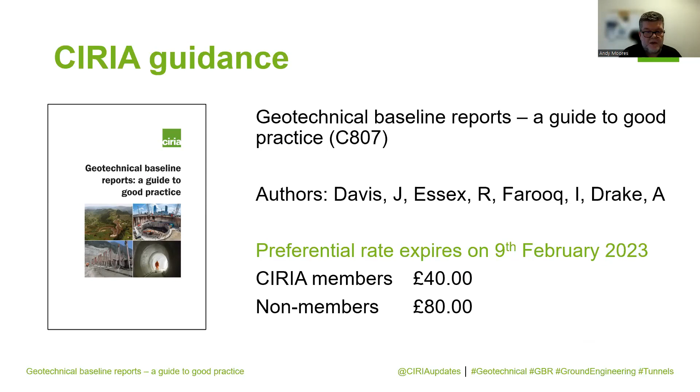We're not going to go through the biographies of all of the individuals. We have biographies which we'll put in the chat as we go, but these are our speakers today: first of all Tom Berry, who was the PSG chair, John Davis, Randy Essex, Anthony Drake, and Imran Farooq, all of whom contributed to the chapters. And as you will see, this is very much a collaborative effort, which extends far beyond actually the author team as well.

Hopefully you've seen this in outline when you signed up, but in essence we're going to take you through the context and the need for this guide, a little bit of the international perspective, the use of GBRs in a UK context, and then into the nuts and bolts of actually drafting a GBR using case studies and the application of GBRs to different types of engineering practice.

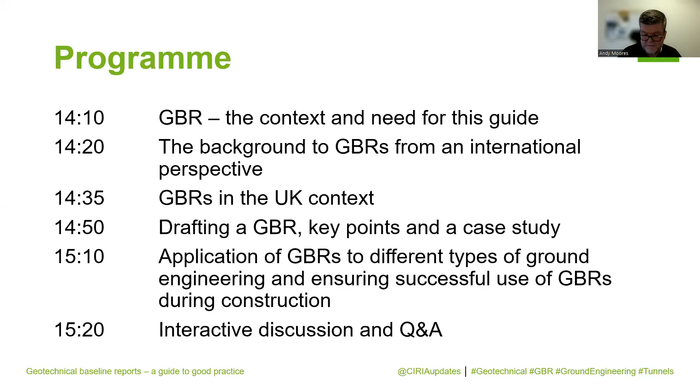So without further ado, I'd like to introduce Tom Berry from Jacobs, who was the chair of our project steering group. Tom, if you want to put your camera on, and over to you. Thank you.

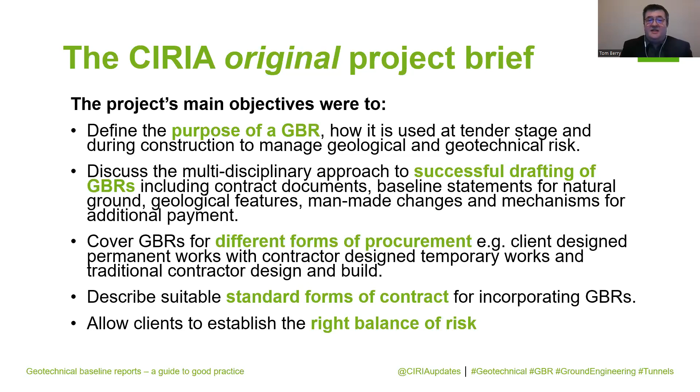There were variations as the project continued, and we got input from the steering group. So through early steering group discussions, the original objectives were refined.

The key objective of the report is to establish a common level of understanding around the fundamentals of a GBR, as there remains some significant uncertainty, maybe ignorance, around what a GBR is and how it should work within the UK context. It's hoped that providing industry with a consistent but flexible approach, as outlined in the guide, will enable a comprehensive understanding of the ground risk and lead to better project outcomes.

The guide will also address some of the shortcomings which stem from a lack of involvement by appropriate construction, legal and commercial specialists, and probably some poor behaviours from both clients in terms of risk shedding or lack of engagement, and from consultants in drafting techniques.

Finally, there is a drive to encourage the use of GBRs across other scales of project and other types. GBRs are not just for tunnels. I've been very fortunate to be able to work on GBRs for piling projects, earthworks, bridges and viaducts. And they've been used successfully there.

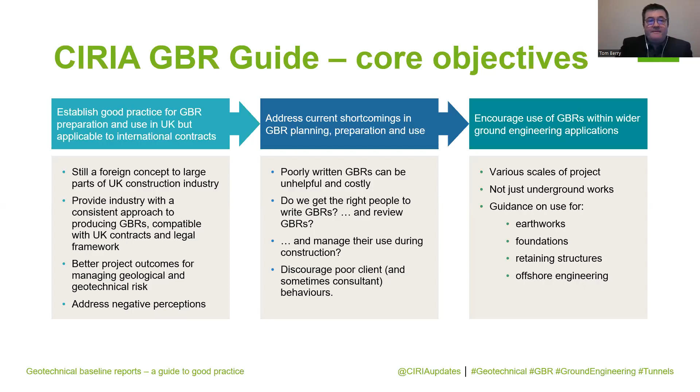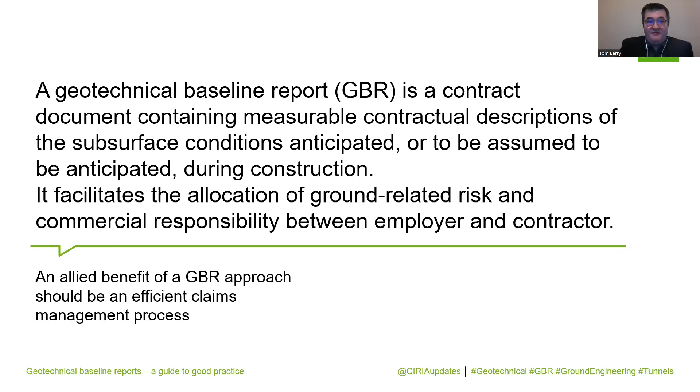So what is a GBR? Briefly, a GBR is a commercial risk-sharing document comprising a set of baseline conditions. We'll talk about baseline conditions later. It provides a common basis for tenderers. It avoids high risk premiums, or the opposite, low bids from contractors who don't appreciate necessarily all the risks or are very hungry to win the work.

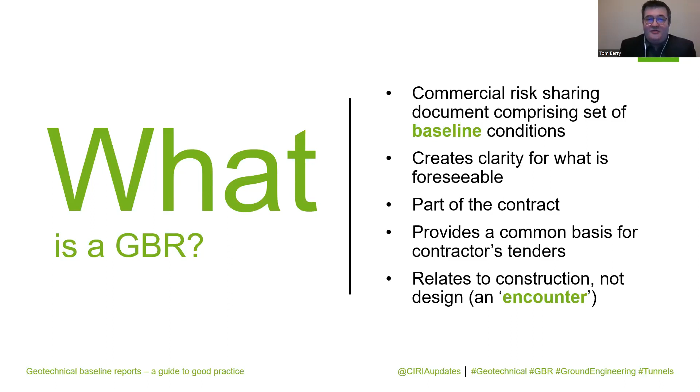It relates to construction, not design. You'll hear John talk about encounters later. We're talking about physical conditions encountered by the works impacting cost or schedule. And these are often subtly and sometimes starkly different from the design considerations. So what is a GBR not?

It's not a risk reduction tool or can be used really to improve cost certainty. GBRs do not generally improve cost certainty. They can and should ensure a more optimal risk allocation based on which party is best placed to manage a given risk, but the risk is moved, not mitigated. It's not a substitute for good GI, but from a contractual perspective, it can fill certain gaps.

It's not a technical document, okay? We said before it's a commercial document. Fundamentally, a GBR is a contract document, not a geotechnical report. The perception is that because the word geotechnical is in the title, the geotechnical profession should have sole responsibility of the preparation, and that's not true. There'll be a nice slide later which shows a number of different disciplines who might or should, depending on the nature of the project, input into a GBR.

And it's not intended to cover every eventuality. I mean, how could it? It would be flawed if it tried to do so. The value of the GBR is on focusing on the key risks and uncertainties and managing them.

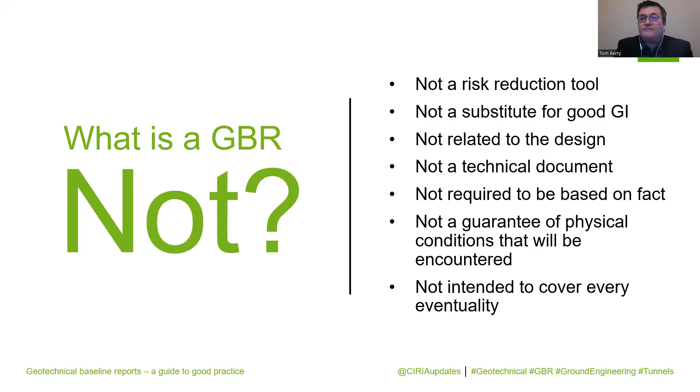So, the core content of the GBR report. The first part of it is about the coverage, okay? So again, the guide defines things in terms of a project chainage or an asset name or a site boundary. It defines physically the area that the GBR covers.

It also provides some really good, clear definitions. Lack of clear definitions can lead to ambiguity and subjectivity in what is supposed to be a document that provides objective clarity. So we've got to be super clear about the definitions, and then the baselines themselves. It's important to convey the intent of a baseline and to offer an explanation if a baseline has been set that maybe contradicts the data. This is to avoid misrepresentation.

Baselines can take many forms, but they must be measurable and they must be unambiguous. And then there's something about measurability of baselines, a method of measurement. Fundamental to an effective GBR during construction is having a simple set of measures so you can measure the baseline. They're often, but not always, neglected is a sampling frequency maybe, and the spatial distribution of tests to measure baselines.

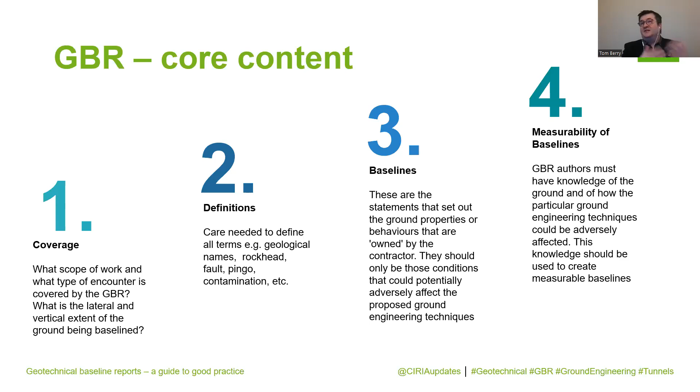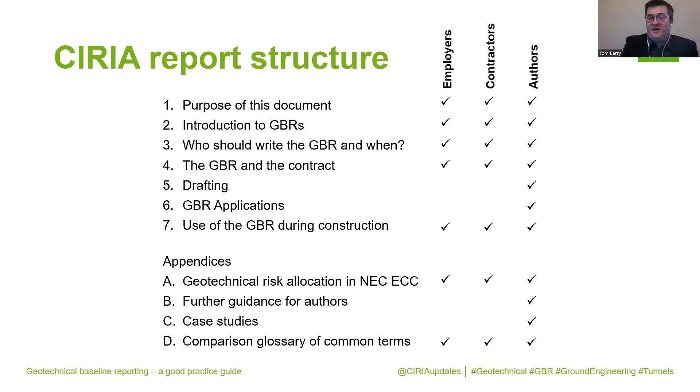So it is with great pleasure that I can now hand over to Randy Essex, who probably doesn't need much of an introduction to those who work in GBRs. And he's going to now talk about the background of GBRs from an international perspective.

Let's talk about the bad and the ugly. It was precipitated primarily in the US, where perhaps we have more barristers per capita than anywhere else, or at least at that time we did. But owners had this attitude of, here's the data, you bid it, you build it, 100% full risk transfer. Contractors bid optimistically. They filed differing site or unforeseen condition claims. And when costs exceeded what they bid, different bidders bid on different bases with different interpretations.

So it was a terribly uneven playing field. As a result, there was an upward spiraling of litigation, which resulted in bad publicity for the owners and rather ugly financial outcomes for the contractors. They had to finance additional costs for years after the construction was completed.

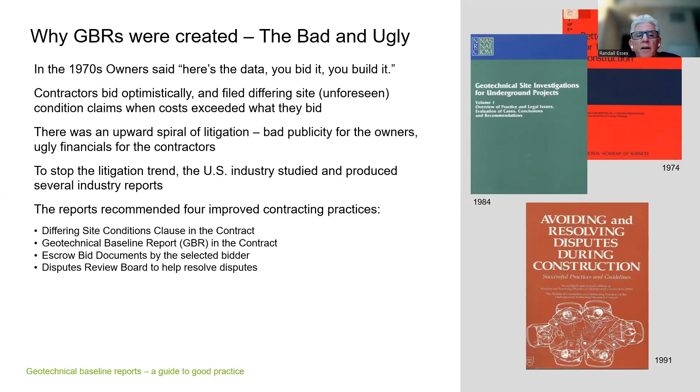The industry said we needed further guidance on what goes into a GBR and what is a dispute review board. In 1996, this document was published—the beginning of what is now known as the Dispute Resolution Board Foundation. You can find the current version of this manual on the web.

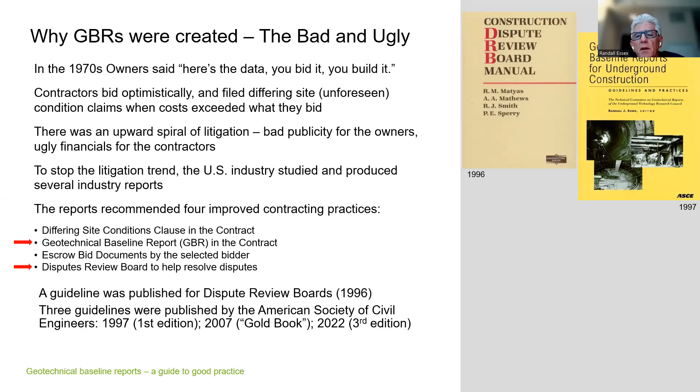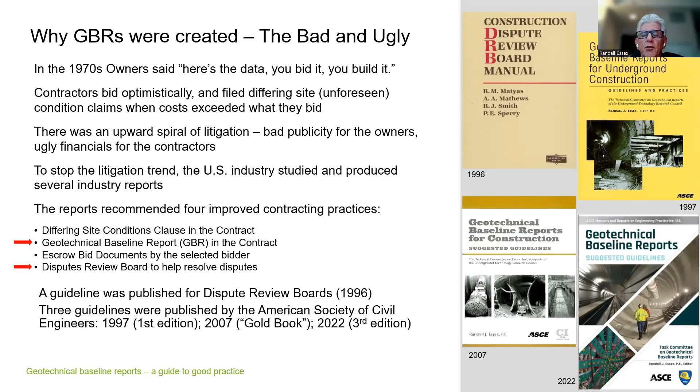And then I raised my hand in 1996 and said, okay, I'll give this a go. Let's pull together a committee and have some industry workshops to understand from the industry's perspective what needs to be fixed or explained. We published this document in '97. Ten years later, we produced the Gold Book in 2007, and literally last month we provided a third update. Each of these documents has built primarily on lessons learned from good and bad experiences along the way.

Well, what's the good? The good is that GBRs have not just been utilized in the US, which was our concern, but have extended in application around the globe. This is an indication of the different areas in the world using geotechnical baseline reports, because people are realizing disputes can upset the tone and delivery of lots of different projects: hydro schemes, water, wastewater, rail, transit, vehicular.

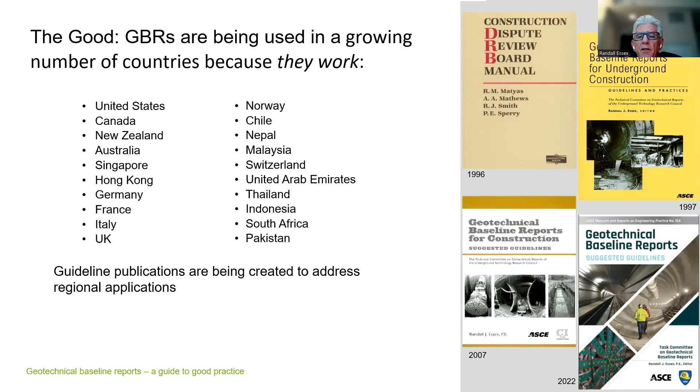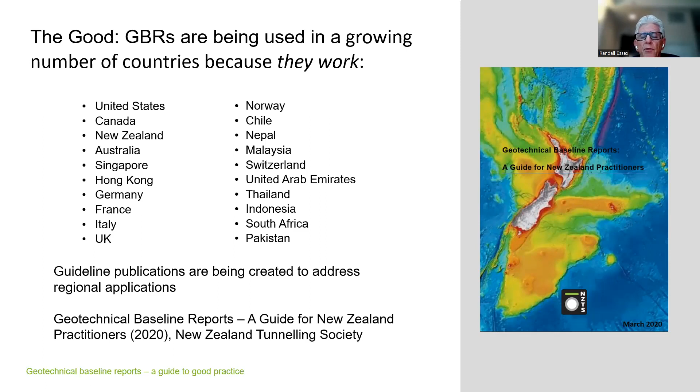As this has evolved, regional documents have been produced that put a spin on local practice, of which the CIRIA publication is one. Another that I participated in as a reviewer was a document produced a couple of years ago by the New Zealand Tunneling Society on how they apply, or desire to apply, GBRs and risk resolution and claims resolution in New Zealand.

Other guidance documents have made reference to the use of GBRs: the Joint Code of Practice back in 2003, updates on an international perspective in 2006 and 2012, and guidelines for improved risk management in the US—it's not a code, it's a guideline. Something I was a participant in was a joint publication by FIDIC and the International Tunneling Association called the Emerald Book.

It's a version of the Yellow Book for underground works, and it talks about a collaborative geotechnical baseline report development process, so that both parties understand the content and have an opportunity to contribute to what the baselines will be that form the basis for tender and resolution of claims. Our new CIRIA document is the UK adaptation for UK practice and UK forms of contract, taking account of some international principles and lessons learned.

So what are some of the principles? Fundamentally, it's no longer a matter of 'contractor, you bid it, you build it.' We're attempting to obtain a basis for fair contracting, where the owner pays a fair and reasonable price for what the contractors have to go through to build the facility through the ground and in the locations dictated by the employer. Bidders can rely on, and will be responsible for, the information in the GBR.

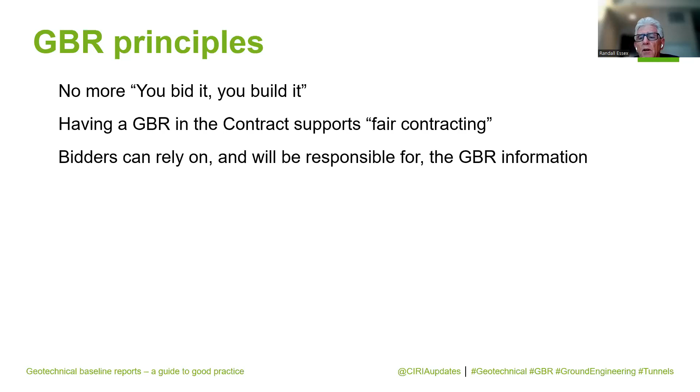It's no longer what they bid as a basis for claim—it's what was indicated to be the baseline under the contract. And one benefit is that now all bidders tender the same risk profile, so we are attempting to level the playing field.

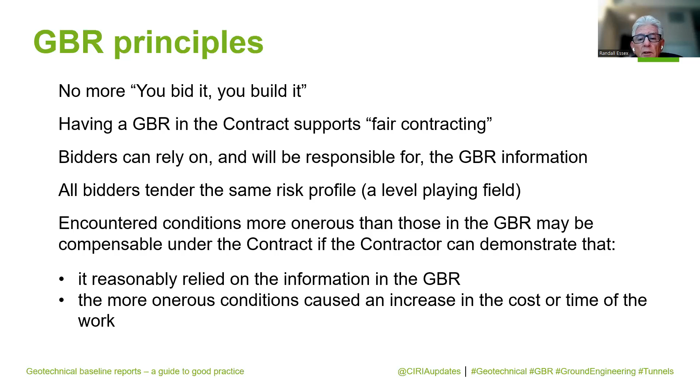Encountered conditions more onerous than those in the GBR and other contract documents may be compensable under the contract if the contractor can demonstrate that it reasonably relied on the information provided, and that the more onerous conditions resulted in an increase in the cost or time of the work. So we look at this—we've got this description in the document that the GBR works in tandem.

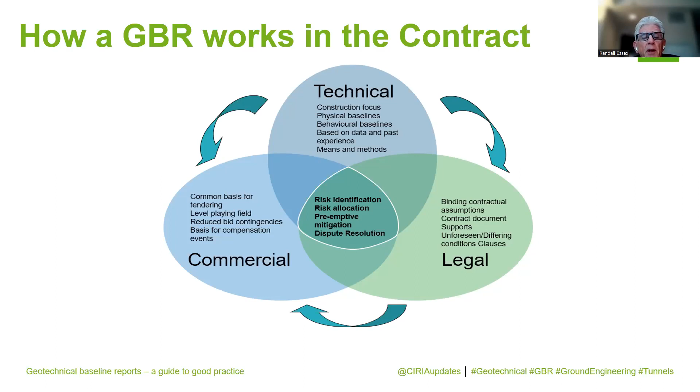It's a technical document, but it's also a commercial document, and it has very significant legal ramifications. And in the center there, our focus is risk identification, risk allocation to the parties as they desire it to be allocated. And it's intended to be a preemptive means of mitigating claims. And if there are claims that do evolve, there's a dispute resolution process and tools to facilitate that resolution process.

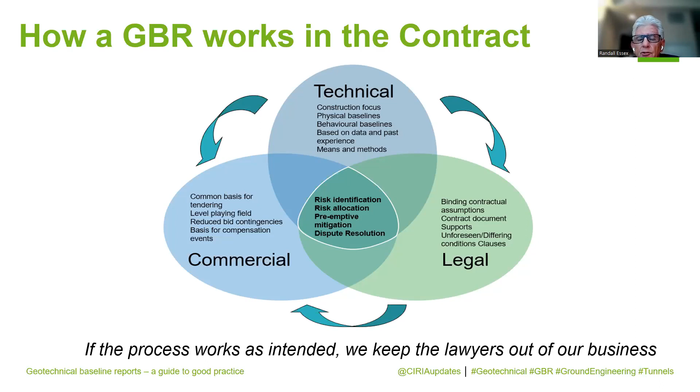If the process works as intended - apologize to all the lawyers on the call, but we keep the litigators out of our business. Let's provide better contracting terms so that the employer and the contractor complete the work as intended for a fair price within the footprint of the construction process, not extending years following.

So the look at the GBR is actually a consequence or the outgrowth of a risk analysis process. In any project, we look at site investigations, we do lab testing, and whether it's a design build or a design bid build, we develop a reference design or a final design.

We do a quantitative risk analysis of the likely events. Those are typically summarized in the geotechnical baseline report based on data in the geotechnical data report. And what it goes into the bid as the known knowns. That's what the contractor has been asked to price.

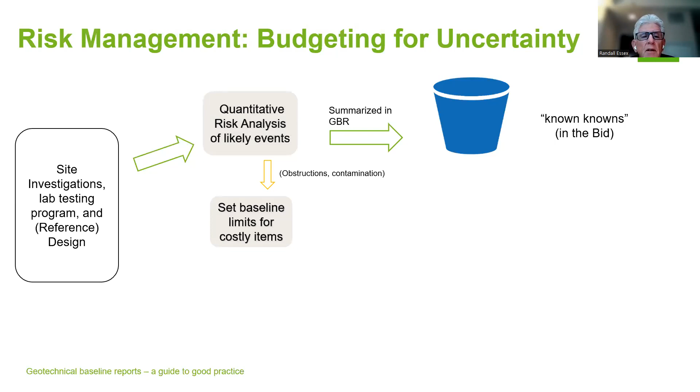Well, there may be other circumstances, obstructions, contamination, the number of hyperbaric interventions, let's say, where we know we're going to have these kind of conditions, but we're not assured as to the quantity. So we set baseline limits for costly items, and these are medium probability but high cost. And there's an opportunity to set aside provisional sums to deal with these known unknowns if and when those quantities in the contract are exceeded.

This is perhaps the most important point, is that we then do a quantitative risk analysis of the unlikely events, the items that are not mentioned in the contract, they're not priced in the bid quantities. These are low probability, high cost. If we included them in the scope of work, one might perceive it to be a budget buster.

But we do provide a contingency fund that is perhaps a 95% capture of the risk analysis that says, in the worst case scenario, these types of events could occur. We set aside a contingency fund that prices the addressing of those conditions. Those are the unknown unknowns.

And we acknowledge that these can only be discovered during construction, because from first principles, we don't have X-ray vision. We do the best we can in the SI, but it's never complete. In both the provisional sums and the contingency fund, the owner or the employer pays for out of these funds only if the conditions are encountered that warrant their administration.

Perhaps this is the most important disconnect that we're finding in a number of circumstances around the globe, is that owners seem to believe that pricing the known knowns in the bid is the basis for their budget, when in actuality, this entirety should be a basis for the budget, knowing full well that those second two categories, those smaller buckets, are administered only if and when warranted.

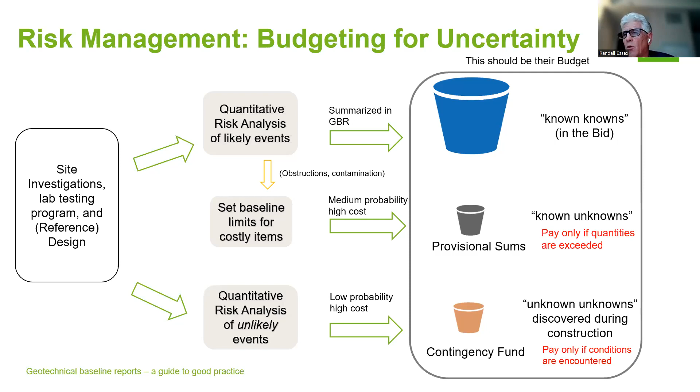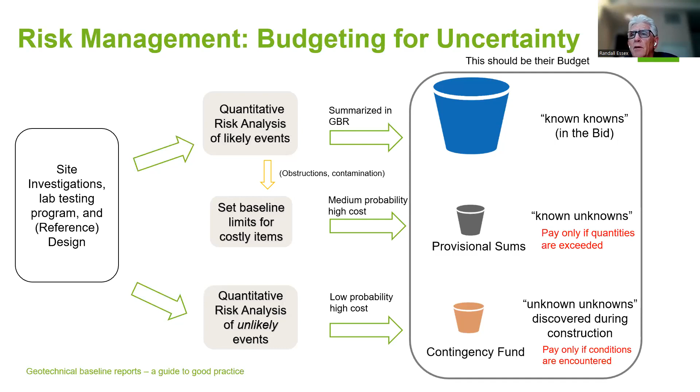I have found that having owners understand what a contingency fund is and having them participate during a process that helps with the quantification is an awareness adjustment that changes their levels of expectation if and when a dispute arises. I think right now that's the most important element in communicating out to the industry, how we can manage expectations amongst all the parties, and so that we avoid animosity if a condition encountered during the construction materializes.

At this point, I'd like to turn it over to Anthony to talk about GBRs in the UK. Thank you very much. Thanks, Randy.

Yeah, so as Randy says, I'm going to switch our focus to the UK context. So firstly, I think it's useful to give a bit of an overview of the relevant history in UK practice, and we do this in the guide as well.

So we start our journey all the way back in 1876, so the case of Thorn versus London Corporation. So this is one of the early precedent case laws, concluding that the contractor bears the risk of changed ground conditions unless the contract makes provision otherwise. And there are a number of other examples that have upheld the same since.

Given that this is a CIRIA guide, it's noteworthy that previous CIRIA reports have picked up strongly on this theme of unexpected ground conditions and risk allocation. A quote from the CIRIA R79 report in 1978: however unexpected the ground conditions prove to be, it's better to have a defined base for the tenders so that it is known where the incidence of the resulting cost will lie.

In the next box, I'm highlighting that there are some high-profile projects with ground-related problems that got the attention, particularly of the insurance industry, and invited scrutiny from government as well. I'm perhaps unfairly picking the example of the Heathrow tunnel collapse. Following on from that, there were a number of government reports, so most people would have at least heard of, and hopefully seen and digested, the Latham and Egan reports.

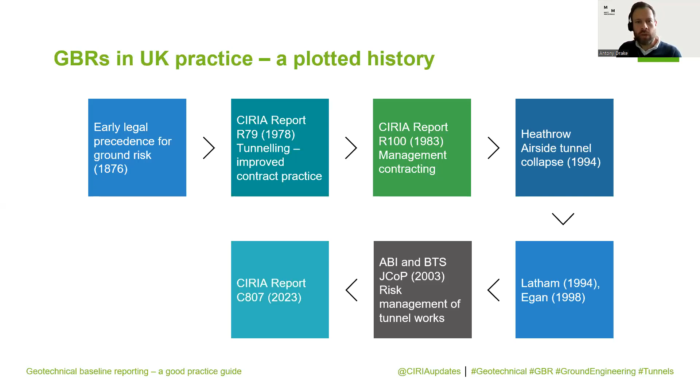Moving on to look at the role of different parties in the GBR, or in its preparation: firstly, I think it's evident that in UK practice, the engineering consultants tend to be the party tasked with preparing these documents, whether on behalf of the employer or the contractor. However, it's only the employer and the contractor, if we set back-to-back agreements aside for the moment, who will be signing up to the risk allocation the GBR proposes.

So one thing we're clear about in the guide is the critical role played by the employer in setting the desired risk profile, and we highlight the danger of consultant-led GBRs without proper engagement by the employer. We're talking here about scenarios where a consultant advises a less well-informed employer that he should use a GBR without full knowledge and understanding of the implications. We also recognise that the contracting parties will sometimes have conflicting interests, allied to an employer's desire for cost certainty on one hand, and a contractor's reluctance to accept poorly defined risks on the other.

The roles of each party are explored much more in the guide, but I wanted to get on to talk about specifically who should be involved in authorship. Fundamentally, a GBR is a contract document, not a geotechnical report, which has been highlighted already. Project teams have a responsibility to ensure the right balance of experience and specialism is reflected in the GBR authorship, and that geotechnical specialists are not left to prepare it in isolation.

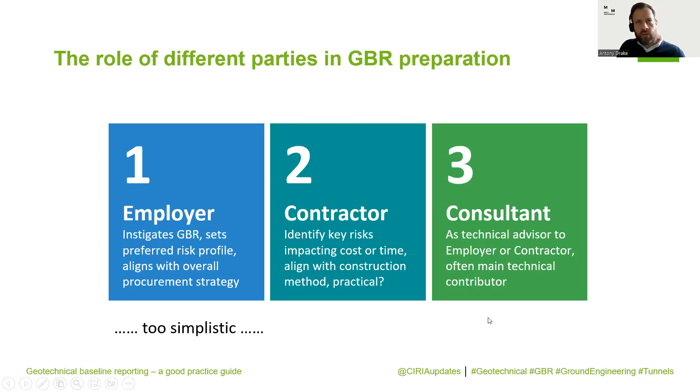So looking at just those three parties is a bit too simplistic. Maybe we have something more like this, which is a figure adapted from the guide. For large complex projects, a team approach is required.

I think we've already said that clearly some of the key people in authorship will be engineering geologists and geotechnical engineers. These are the people that understand the ground and the design intent.

Knowledge of the ground prior to construction is always going to be imperfect. The hazards presented by this imperfection arise from physical gaps in knowledge, maybe physical gaps between boreholes, or from the inability of ground investigation techniques to fully characterise the nature of the ground.

So the starting point for well-informed risk allocation should be the conceptual ground model, and then that is augmented by observation from ground investigation and testing, previous construction records and desk study, etc. John will talk more about this in the next session.

But so who else do we need? Well, procurement contract specialists, partly to advise on drafting unambiguous, concise baseline statements, and partly for adapting contracts to incorporate the GBR. We need people with detailed knowledge of the relevant construction techniques and/or equipment that's going to be used and what its limitations might be, for input to what could go wrong and input into practical measurement on site as well.

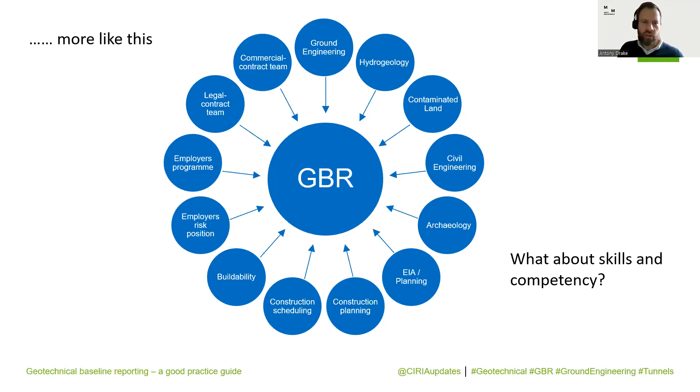So the guide provides much more detail around specific competencies, but the most important factor is relevant experience, and that's experience in using GBRs. We make the point that that's far more important than experience in writing GBRs, as only the former provides the necessary experience of the contractual nuances and also that practical implementation on site.

Now, the guide is written in a contract neutral way, and therefore we've not attempted to cover the specifics of different forms of contract. There is, however, a useful appendix on guidance for integrating a GBR into the NEC engineering and construction contract, and many thanks to Richard Patterson for his input on that section.

But these are the key generic points that the guide does address. Firstly, the GBR must be part of the contract, which in most cases will require amendment to the standard form of contract, the new FIDIC Emerald book, which Randy referred to being a notable exception.

Two, the GBR also needs to link the exceedance of a baseline to the contract's mechanism for claims for additional time or money, and this is often relatively straightforward to do.

Thirdly, because the aim is an unambiguous allocation of risk, the GBR must take priority over other potentially conflicting information in the contract, and many forms of contract will allow for a hierarchy of contract documents to be stated. The NEC is actually a notable exception to this, and the guide provides specific advice in the appendices for how to overcome that.

Number four, one important point the guide makes is that a GBR cannot cover every eventuality, and therefore the contract should address how risk is allocated for conditions outside the scope of the GBR rather than remaining silent and therefore ambiguous. This might be by reverting to the standard foreseeability test in the contract.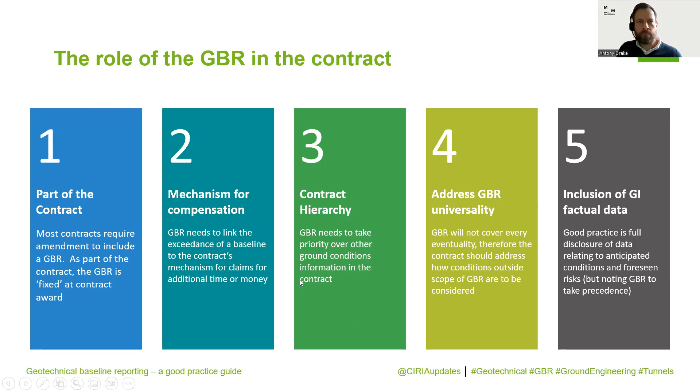So moving on to look at the timing of the GBR. A common theme throughout the guide is that the final GBR should be prepared as late as possible to ensure it comprises the most comprehensive GI data and reflects the latest project layout and requirements.

When a GBR should be prepared and the point in time at which it becomes contractual will vary between different procurement scenarios. So firstly, looking at the traditional procurement where a contractor is engaged to implement a design prepared by the employer. Now, this is a simplistic view. Please don't get hung up on the terms I've used or the precise positioning along the timeline. The key point is that understanding of geotechnical risk and design maturity is increasing from left to right.

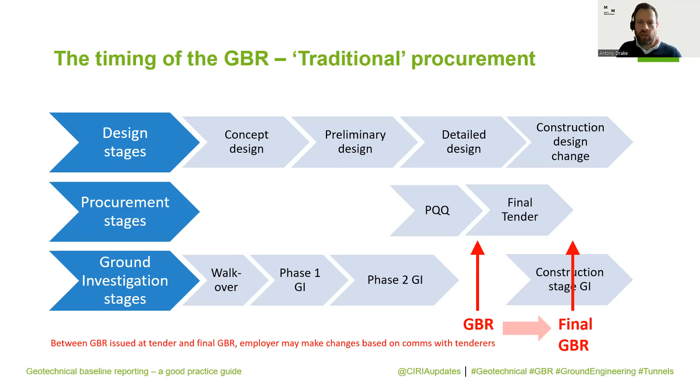In this case, a GBR can be issued at tender, incorporating a mature knowledge of the ground conditions, and the employer may make changes before finalising the GBR based on comments and clarifications from the tenderers.

Now if we look at D&B procurement, most of our major infrastructure in the UK and indeed globally is now being delivered on this basis. Again, this is a simplified view, and there are variations on the theme, and relative timings of stages will vary.

The key points are that a GBR may be based on limited knowledge at tender stage, but there is typically an opportunity for the contractor to propose changes, and this is really important where the contractor has the latitude to propose alternative solutions and cost-saving innovations. However, the final GBR at contract award will still often come ahead of completion of ground investigation and in advance of detailed design. So these staged GBRs are often referred to as a GBRA, GBRB, and GBRC.

We've already touched on the fact that a GBR can be an effective tool for filling gaps in the ground investigation information, setting a common set of assumptions against which contractors can price the works without necessarily pricing risk associated with those gaps in knowledge.

We also had a lot of discussion within the project steering group around the timing of GI data availability relative to when the GBR is written. So, for example, what happens when GI data is continuing to come in, but you've already drawn that contractual line in the sand in the GBR?

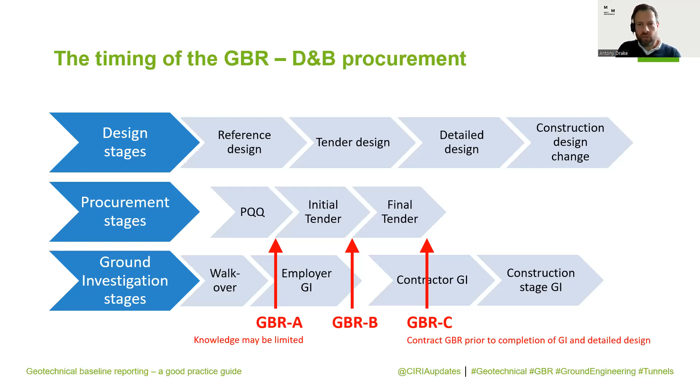So I'm now going to hand over to John, who will pick up on some of the points raised around conceptual ground models as a starting point for baselines and talk more about drafting and measurability.

Good afternoon, everybody. Good afternoon, everyone. We are slightly ahead of schedule, so the pressure's on me to keep that in play. What I'm going to talk about really under this heading... hang on, take control. Yes, there we go.

So this document is about 80 pages long, and about half of those 80 pages are really on scoping and drafting of GBRs. So I can't possibly hope to cover all of that in this short session. We're going to focus on these 3 points, and then there's a simple and short Crossrail case study I'll run through at the end of that.

The reason I'm focusing on these 3 points, and you may disagree with me on this, is that I think in UK practice GBRs in general over the last 10 years or so haven't necessarily always performed terribly well on these points. So that's why I'm focusing on these today.

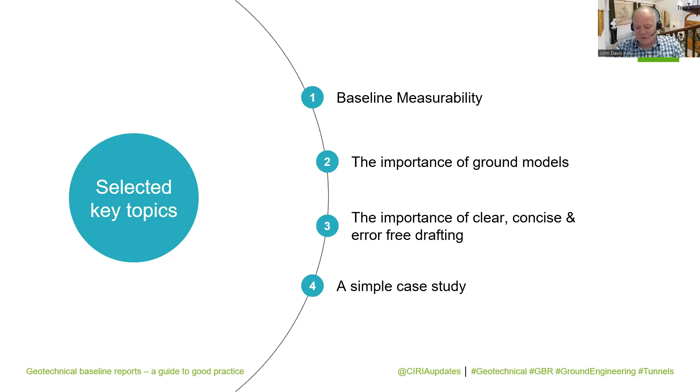So if we start with baseline measurability, this is absolutely key. And if we baseline things that can't be measured, there's kind of no point. It isn't really a baseline.

And that creates a difficulty because many ground engineering techniques, and bear in mind somebody mentioned this earlier, Tom I think, really what I'm talking about here is the encounter, that's an NEC term, between whatever it is the contractor is doing and the ground. And if that goes wrong, we have a potentially adverse encounter, and he may need to think about what the GBR says, or what the contract data says, about whether that's unexpected or not. So in many ground engineering techniques, like piling, closed face tunneling, ground improvement and so on, earthworks, you don't necessarily get to directly encounter the ground.

And sometimes, particularly if we get into earthworks, into ground treatment, what we're doing to the ground changes its properties. So we don't actually get to see it as it was baselined.

In the past, I was heavily involved in Crossrail GBRs for quite a long time. I think we have 30 something GBRs I had a hand in writing and then helping to administer during construction. And I will hold my hand up here and say, certainly there, and I think in many others I've seen, there's a tendency to put all of these observational difficulties to one side and just baseline the sorts of things you would see in a factual or an interpretive report.

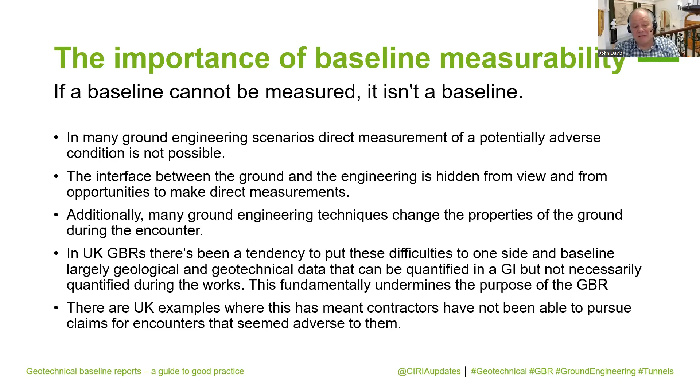So we put this in the guide, this little classification of types of encounter, not as a thing you need to record or formalize in any way, but more as a helpful aide-memoire to try and get GBR authors to be a little bit more creative, I think.

So in its simplest sense, the important point about this is this class 1 to 4 - class 1 is the most desirable and simplest form of encounter, and class 4 is probably the most difficult one. If we start with class 1, an obvious example would be if somebody's digging a big hole and some properties in that hole have been baselined, typically strength of the material, then it's relatively easy to go into that excavation and directly measure, let's say, undrained shear strength.

Class 2 is where you would need to measure things indirectly, close to the encounter, measure things in the ground indirectly, such as by doing a little bit of a simple or additional GI. Class 3 is really where you start to get into feedback from whatever equipment is being used, instrumentation or some other thing - tool wear is a good example. And class 4 is really conditions that are not actually measurable directly or indirectly.

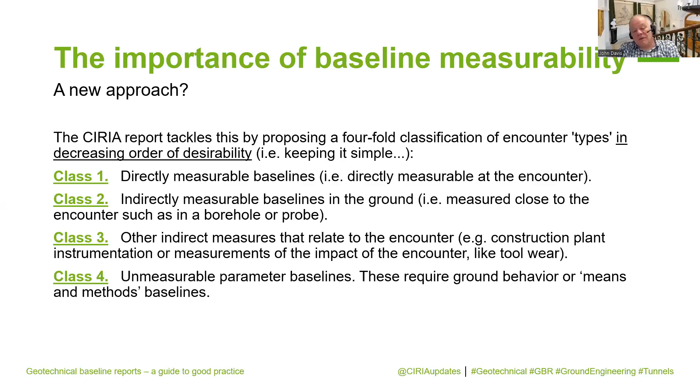Means and methods is a similar form of baseline, where in that situation - cross passage with mixed, potentially water bearing ground, and you don't actually know what's there - then you could say in the GBR this cross passage will be built by ground freezing methods. And that forces the contractor to allow for that price, but choose in practice to do it by another means if he wishes.

So to repeat what I said at the beginning, that classification is really just to make people sit up and think a little bit and move away, if they're geotechnical people writing these GBRs, from the sort of interpretive report type approach, which is often, as I've said, not terribly helpful. But this means whoever's authoring the GBR really does need to know in some detail how whatever the construction technique or the bit of kit is actually works, what its capabilities are, what might trip it up, and what measurement opportunities it presents.

And that may even feed into specifying certain sorts of sensors or monitoring on a piece of equipment. And obviously, there's an example over the page in the next slide - sometimes a little bit of creativity will be required in order to make this work.

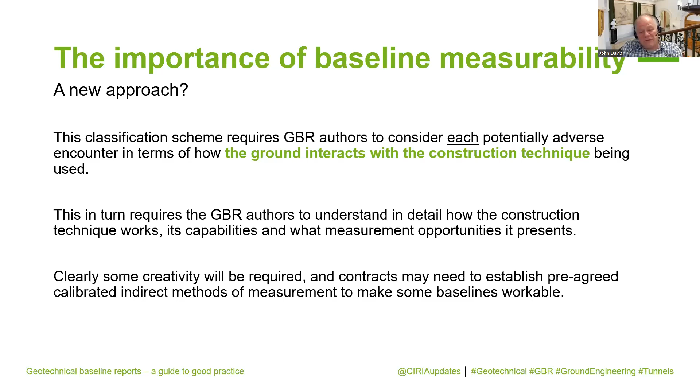Here's a very simple example of a potentially different approach, and this has been quite a common one in the UK. I think every chalk tunnel GBR I've seen, including the ones I wrote for Crossrail, says the TBM will encounter a number of layers of flint in the face. Obviously there's a potential wear issue with that, and there you are, go away and deal with it, Mr. Contractor. But of course the only opportunity in a closed face machine, a slurry machine like this, to measure is...

to send somebody into the head and have a look, rather like this photograph from Crossrail. Somebody's gone in, had a look, and taken a picture. Now that is a slow, expensive, and potentially dangerous thing to do. And actually what it gives us is a discrete measurement opportunity for what is in practice a continuously adverse encounter. So it doesn't work on many levels, and effectively is unmeasurable.

So really, maybe the creative thing to do is to change your ground investigation approach so that you can quantify the quantity of flint in any one particular horizon, and that might mean doing things off-site on a field exposure, then measuring the quantity of flint that comes out of the slurry treatment plant. This sort of thinking is sometimes required.

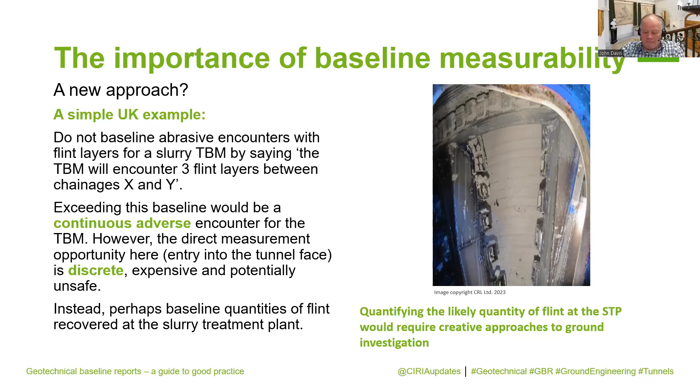Right, so that's enough of that. We'll move on to conceptual ground models, and I think this will hopefully answer a question that appeared a little while ago around why GBRs are not necessarily based on fact. I'll come back to that a bit more in the next slide.

I think the bottom right-hand part of this slide is probably a key reference, and it was only just published last month or two months ago now. I'd encourage you to screenshot this, and if you're not aware of that document, go and get it. It's completely free, and what it does is set out a succession of different sorts of ground model, which is what I'm going to talk about for the next few slides.

If you look at that little section there in the middle, taken from a Crossrail drawing, you can see all the different colors, all the different stratas, and you can see somebody's drawn lines on there as a strata boundary, but they don't actually match the strata boundaries in the borehole sticks.

Now why do we do that? I don't really know the answer. Do we consider their validity? Those lines are likely to have appeared in a report somewhere. And what do we do about thinking about what is happening in the gaps between individual data points?

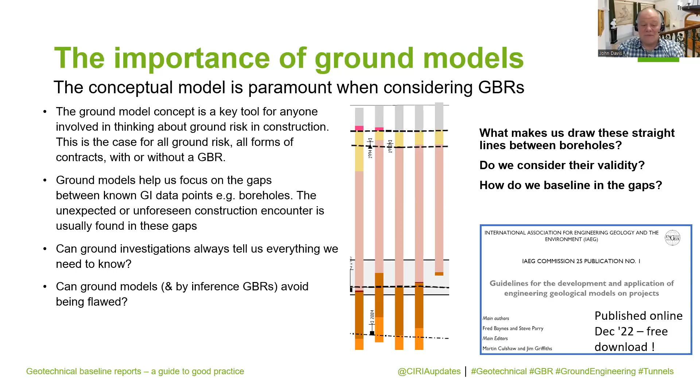And whilst we're considering all of those things—the lack of information in the gaps, the uncertainty in the gaps—we need to also be thinking about whether any ground investigation can always tell us everything we need to know. I think the answer to that is obviously no. And similarly, can any ground models that flow from all of that work, and by inference, ground models set out in GBRs, avoid being flawed? I think the answer to that is also no.

So what that IAEG ground models report from the last slide sets up is this succession of ground models that go from conceptual ground model, through an observational ground model, to an analytical ground model. That's a very traditional design approach—we're all supposed to do this, for instance in the UK and Europe through the Eurocodes.

The conceptual ground model is broadly analogous to a desk study, and that's where, if you like, the engineering geologist, probably more than anybody else, sets out what might be there in the ground. Then you can start to think about construction methods, potential problems with those methods, and so on.

You go away and design a ground investigation or gather existing information, and you start to build up what is an observational model based on facts. Then when you come to design whatever it is you're designing, you tend to simplify that observational ground model and focus on certain design parameters, which are then subsequently factored down and so on—cautious approaches in EC7 and everything else.

So that doesn't work in construction—there are no additional factors of safety and caution applied. So what you have to do in a GBR is create a commercial ground model. And because there are these data gaps between boreholes in knowledge, there may be all sorts of things around not being able to get GI kit into certain locations relative to your structure.

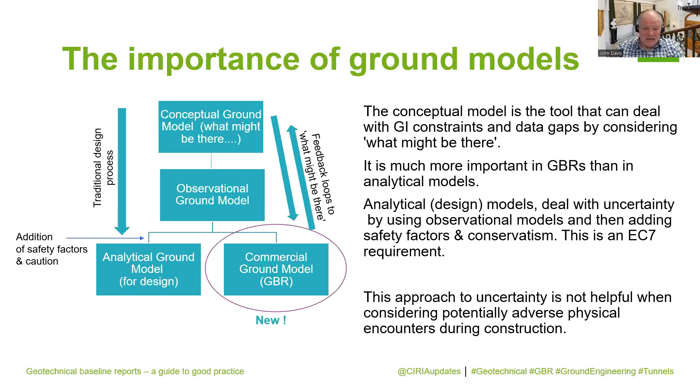Here are some super simple examples of why conceptual models can be very important. The top one is basically London based. That sort of situation with a sand channel and a fault in some estuarine clays is actually incredibly common if you get deep enough under London. And if your boreholes miss it, then you're not going to know about it. So you have to be aware of that conceptual possibility that you might have those features in the ground, but you might not catch them because they're in the gaps between your boreholes.

Similarly, another super simple example, and actually one that is surprisingly common in disputes, is in a glacial till, maybe in old terms, boulder clay. You can't encounter a boulder in a borehole — a boulder's much bigger than a borehole. So how do you account for this wide range of potential obstructions, including some which might be very large, or for geological reasons may be concentrated in particular locations? To deal with that in a commercial ground model and a GBR, you need that conceptual insight.

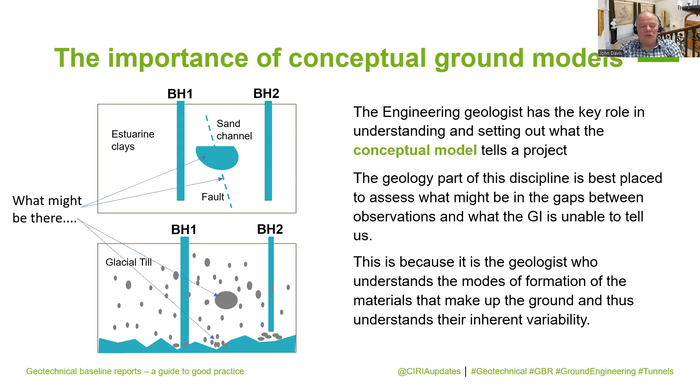Right. I've certainly been involved in a few projects where I've had to help contractors out with GBRs, where simple drafting errors or simple errors in the geological characterization — really simple errors in conceptual models — opened the door for the contractor to make perfectly valid claims, but ones that the owner or the client wasn't expecting, because he thought he had a pretty good GBR.

So the first thing is really you need to check and check again. You need, as Anthony said, a large and diversely experienced authorship team or checking team to get over this. And fundamentally, you need to get that ground model right — you need to get that conceptual model right in the first place.

I think near the bottom there, I've said engineers don't normally draft commercial contract documents, which is an obvious truism, but they do draft GBRs. And I think there's been a tendency in the past to try and make them familiar and treat them a bit like interpretive reports. That's fundamentally wrong. Ands, ors, full stops — all these things are incredibly important. There's a lot of text in the document, in the CIRIA report, about drafting and around these issues.

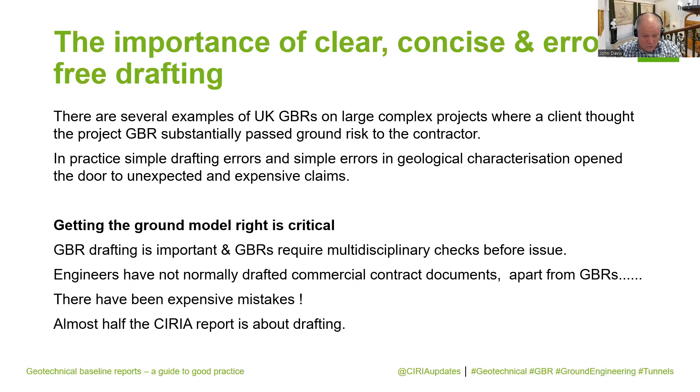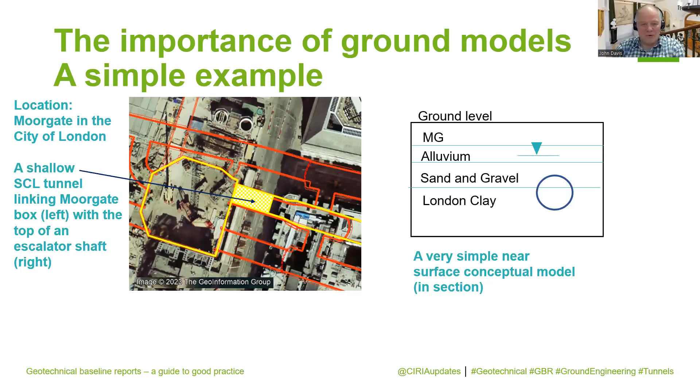So if you just concentrate on the left-hand side of this slide to begin with, by the time we got towards the end of the ability to get GI data for these two particular contracts, we only had those 4 boreholes on the left. This is mainly because there were buildings in the way which the project needed to demolish, and the impossibility, because of all the services and sewers in Moorgate, of doing any boreholes in the street. So we had that information, and you can see those contours there on the top of the London clay.

And we've got this massive hole, which is not entirely unexpected in London, but that's a different presentation. Massive hole, effectively full of sand here.

So the GBR at this point, effectively that observational model was turned into a commercial model in the GBR by baselining increased thickness of the river terrace deposits in this area, and specifically in that SCL tunnel, because that's where it was going to be difficult to deal with. Digging sand out of the big box on the left rather than London clay is not really a particularly onerous thing.

So the construction approach that was required at tender based on this conceptual and commercial GBR model, and it's conceptual in this location because we didn't have any boreholes, was fundamentally to grout up the river terrace deposits, the sands and gravels above the tunnel, and then also to add a pipe arch where we were breaking into mine the tunnel from the box.

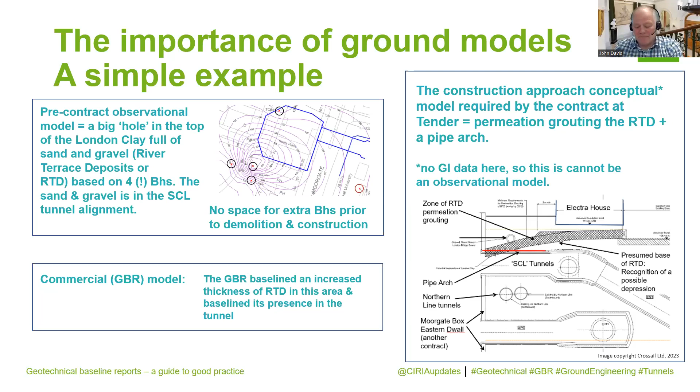So by the time we did all the grouting and we got a lot more data, and by this time we'd also demolished the building above the box and started to dig the box out. So we gathered lots and lots of data post-contract award, and that's what this big hole looked like in detail, still full of sand.

And you can see where the start of our tunnel is, we thought we had almost a full face of sand and gravel full of water, which we thought we'd grouted up. But when we opened up, what we actually found was a whole load of clay sitting with little sand channels in it, sitting on the London clay.

And those blue lines you can see on there, not blue in practice, we just coloured those in. They are all the grout we thought we were permeating into the sand and gravel. So clearly we weren't. This is actually less onerous than finding all the sand and the water, but it's clearly a failure of the conceptual model.

What happened here was actually the GBR, because of the way it was phrased, said that the river terrace deposits would have some clay in it. And clearly there's an awful lot of clay in it. But on the face of it, there was no opportunity for the contractor to claim for all this time and effort he'd had to put in to unnecessarily grout up.

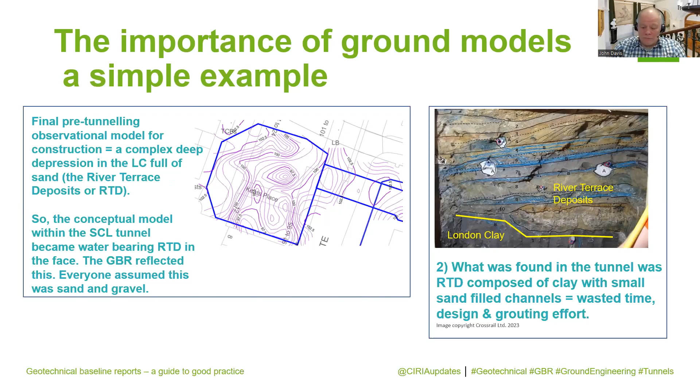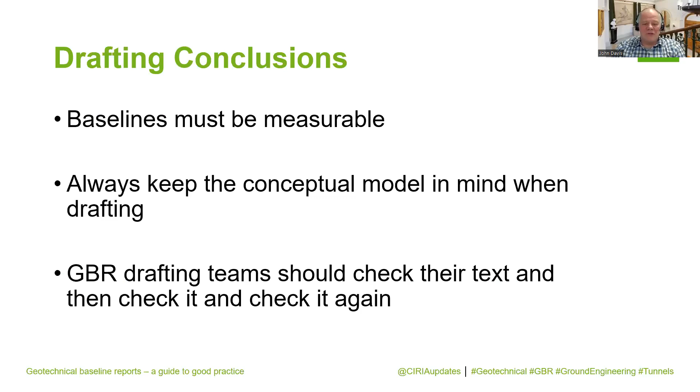So, final slide from me. Baselines must be measurable. If you take one thing away from this presentation, or certainly from my bit, please remember that. And when you're drafting, always keep that conceptual model, that what might be there thing, in your mind when drafting. Because I've seen lots of horrible, silly mistakes in GBRs where contractors have managed to extract large sums of money out of their clients, you really do need to check, and check again.

Thank you very much. So now I would like to pass on to Imran to talk about all the sorts of things we can apply GBRs to other than tunnels.

Thanks, John. So I was just going to start with stats. I went and looked at this report, and it's quite important to highlight some of the facts that they have used to come up with some projections on what could happen on UK infrastructure projects in the next 10 years. This report was written in 2019.

At the time of this report being written, there was nearly £600 billion worth of infrastructure work planned for the UK. The study showed that nearly 80% of UK infrastructure projects run over budget due to poor planning, equating to about £19 billion every year, roughly 30% of the overall cost incurred on these projects.

There were a number of conclusions in this report, but two I wanted to highlight: poor predictive abilities of project teams in the early stages, leading to cost overruns and delays, and procurement based on cheapest price. I think it's worth highlighting that a lot of these can be related to mismanagement of ground risk.

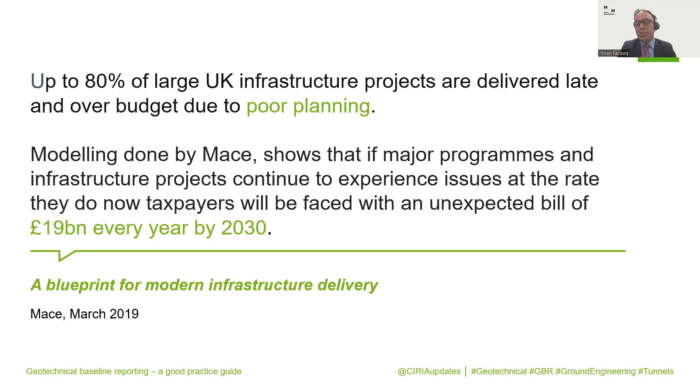The other speakers have illustrated why GBRs could be a good risk management strategy to deal with ground risk. But I thought I'd use that as a starting point and go into some examples of the various applications of GBRs that can make projects more manageable in terms of ground risk.

We know we've got a lot of history of using GBRs in tunneling projects, and probably more recently in piling and retaining works. But as the industry has started using more GBRs, we're starting to see examples of what can cause delays in these types of projects.

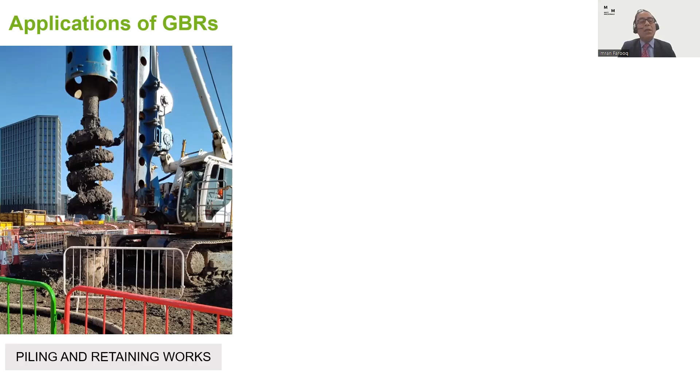In terms of piling and retaining works, a poor choice of construction equipment to construct the piling or diaphragm wall work, or excavation of the materials, can lead to delays and potential overruns. Strategies for managing that, especially using GBRs, would be one way of doing it. I'll illustrate this more in an example later on.

Similarly with earthworks, we have a number of projects where there's a misunderstanding or lack of recognition of the type of foundation soils that will be encountered, leading to inappropriate choice of ground improvement techniques, or not recognizing the appropriate material reusability classification, therefore leading to a mass haul imbalance.

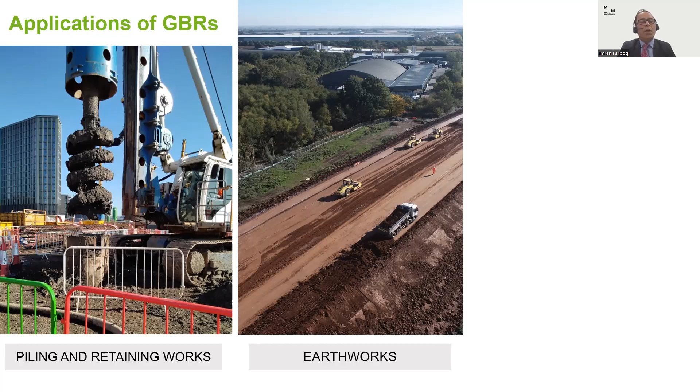Similarly, we have a few offshore projects where we tend to focus a lot on the foundations of the offshore structures or wind farms, but not necessarily on the ancillary works like cabling that goes to these assets, which again can lead to a lot of overruns and cost delays.

What we've illustrated in the presentation so far is that there are ways of taking the data we have to identify the intrinsic properties of the ground and create or define baseline conditions, which then help with managing ground risk through a GBR process.

Just to illustrate that, I thought I'd use an example of something I've dealt with in the past, and John's briefly touched on this as an example. This is a glacial soil project where the cause of the delays led to some cost and program overruns.

As I said earlier, the biggest delay in piling and diaphragm wall construction is usually inappropriate selection of construction techniques. This could be caused by insufficient ground investigation, inexperienced contractors, or ground investigation models skewed towards establishing the designs.

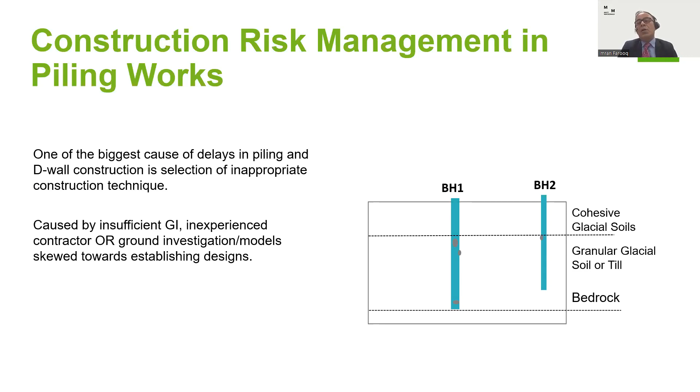In this example, this is a bridge foundation where the designer took the information they had and came up with a ground model based on the boreholes available. They developed the bedrock, defined the pile penetration to terminate on bedrock, with a potentially cautious estimate of ground parameters.

Probably it can be said that this is a good theoretical design, probably wished in place, but it has some inherent risks, which the designer has highlighted in the risk register.

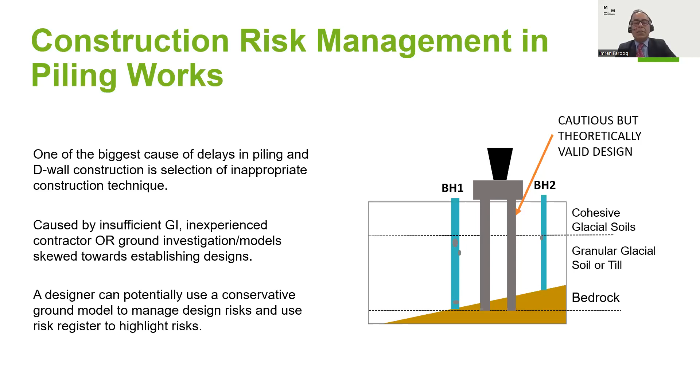However, when the contractor comes to select the construction options for these ground conditions, they have to look at the conceptual ground model, which is flagged in the risk register, not in a GBR on this project.

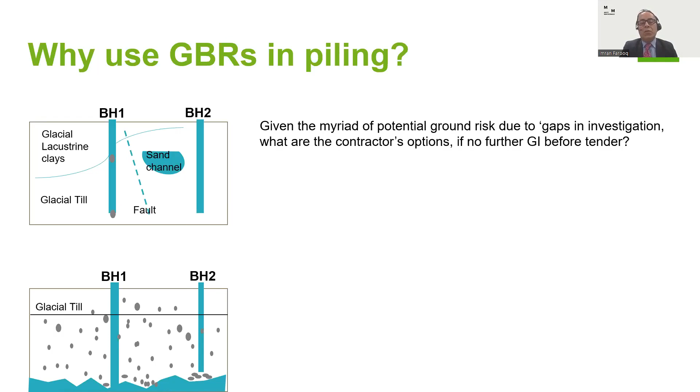You could have, as you do in glacial soil, some sand channels, possibly some faults. You may have some glacial lacustrine deposits. And then, as John briefly mentioned, you can have cobbles, but also boulders in there.

Now, for the selection of the piling technique, there's a myriad of potential ground risks in this situation. The contractor has to consider whether they can use CFA, cased, thin wall, or segmental casing, pre-augering of the ground, or larger rigs capable of drilling into the rock.

In this situation, the piling contractor selected a cased and augered pile with a thin wall casing. However, the selected rig was not sufficiently strong to get through boulders and/or rock.

What transpired in this project was that the contractor had a choice of whether to go with a high price with low risk, or low price with high risk. They selected a low price with high risk approach, so they did not have a technique to deal with any ground risk if they encountered it.

Now, on a project like this, you'll have a contractor and a subcontractor, and when they encounter a problem, you can have some contractual difficulties. In this project, what transpired is they actually did encounter some boulders. They did not have the appropriate tools to deal with piling through the boulder, which led to some delays.

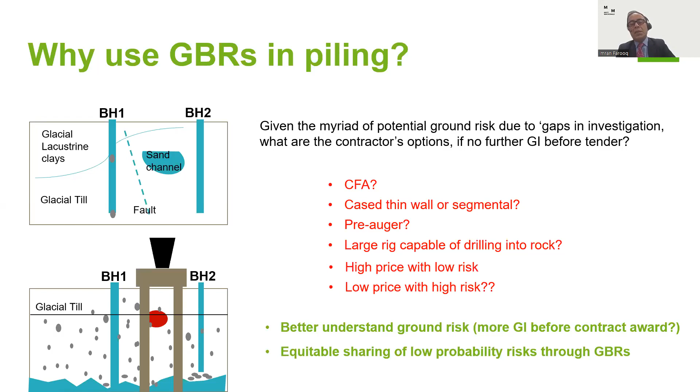The actual cost of managing that risk on site would have been pre-drilling, which is what they eventually had to do. However, because the risk allocation and dispute resolution weren't established—there wasn't a GBR—the amount of time it took to deal with this situation led to the actual program being delayed. The actual program delays would have been substantially higher than the cost of dealing with the obstruction or the boulder.

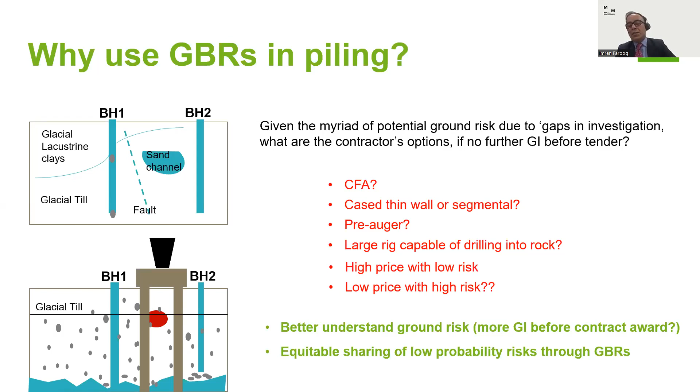So I'd go back to what Randy said earlier. If in this situation we had either more GI to establish the presence of a boulder, or a process that allows some cost to be allocated to known unknowns—which in this situation could have been a known unknown—that would have helped deal with this problem. The GBR guide provides this type of information to help us with risk allocation going forward.

Similarly, in earthworks, we have a number of scenarios and things we have to think about which would lead to potential delays and cost overruns. We have to recognize foundation soils and the type of foundation we'll deal with, whether it's cutting or embankments, mass haul and reusability of materials, slope angles and groundwater. All of these things, if known, will lead to a good construction method being selected.

However, there are some unknowns related to these. There can be some delays, and providing some baselines would help with these situations.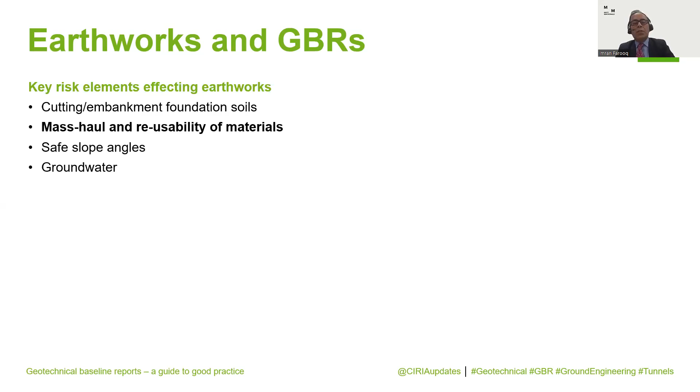So I just wanted to show an example related to mass haul. We all need to recognize that sustainability and cost considerations are paramount in mass haul, and especially nowadays we have to take it quite seriously and apply that to our designs and solutions. Clients, designers, and contractors should be looking to limit imports, reduce double handling and lorry movements wherever possible.

So this, as an example, is an earthworks where the solution of balancing the earthworks would require the materials to be treated, because you cannot get class 1 materials or better from the cuts, but you can get class 2. However, the earthwork specification is such that treatment of the earthworks is required.

What the bottom figure shows is that you can have total potential sulfate in these earthworks that could exceed 1% in a small localized area, which would preclude the use of treatment of this material for reuse in the embankment. Now this is a situation, again as highlighted earlier, where we could consider either having a...

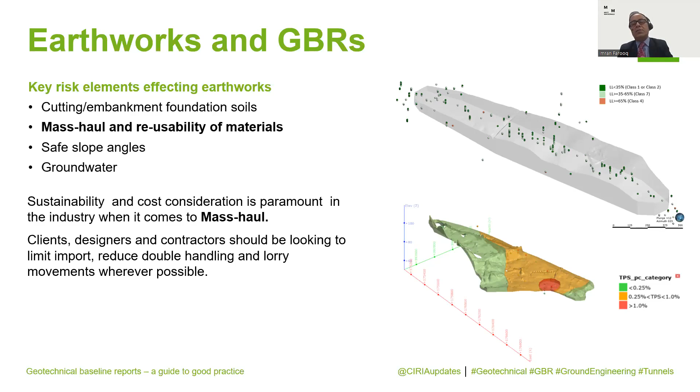allocation for dealing with situations where, if the material cannot be treated, the costs associated with that can be managed through the GBR, or alternatively, you could quarantine parts of this earthwork to provide GBR statements related to those areas, helping the contractor manage the risk as they proceed with construction.

There are a number of measurable properties in the soil that can be used to provide a baseline. There's a list of these in the GBR guide document—Atterberg limits, chemical content within in situ soils, groundwater levels, moisture content, etc.—which are directly measurable and can be used for baselines.

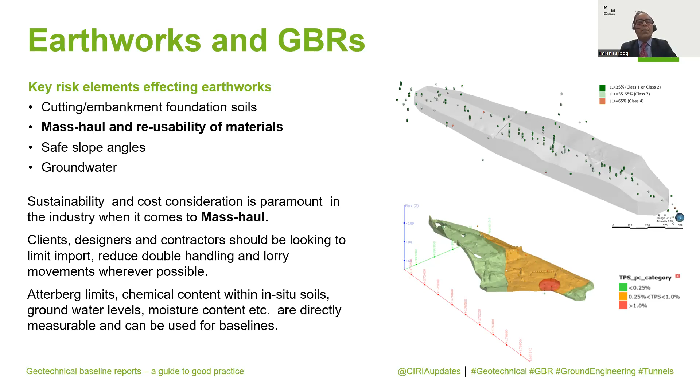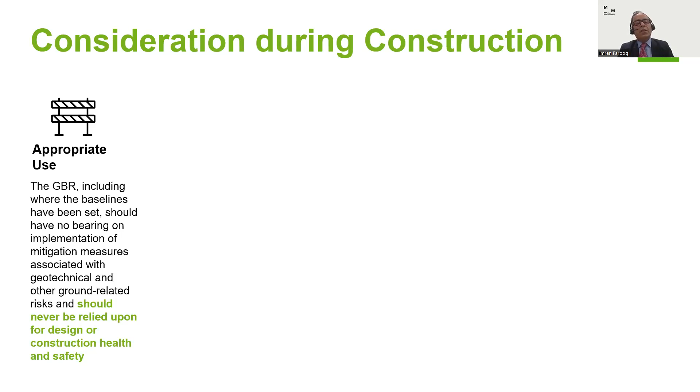Next, I was going to move on to some considerations during construction, just some highlights we've listed in the report. The first thing to highlight is that the GBR is a commercial document associated with risk allocation. It is not a risk mitigation or risk management document for design, and should not be used for either design or construction, and or health and safety.

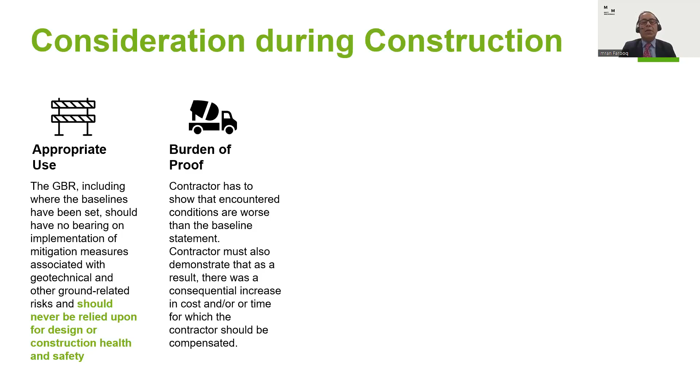The second key thing to keep in mind is the burden of proof of baselining is with the contractor. So the contractor has to show that the encountered conditions are worse than the baseline statements, and then not only that, but they also have to demonstrate there's a consequential increase in cost or time which the contractor should be compensated for.

I think one of the key messages for people to take away from this document is we need to have collaborative processes early on in the use of GBR. You should not wait till there has been an adverse encounter to deal with the problems. Having a transparent data management strategy that's a collaborative process between the contractor, client, and the designer will help with potential disputes.

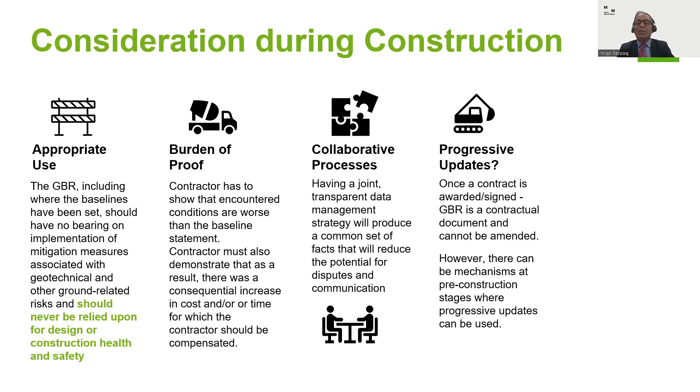One of the questions that does come up is progressive updates. Once the contract is awarded, a GBR is a contractual document. However, Anthony's just shared some examples of where there are some mechanisms pre-construction stages where progressive updates can be made.

And then finally, having the right personnel to manage the construction process is fundamental, and a conversation and a discussion should happen at early stages to recognize who is going to measure it, who is going to submit the compensation events, what type of dispute resolution board or mechanism needs to be put in place to manage these as we go along.

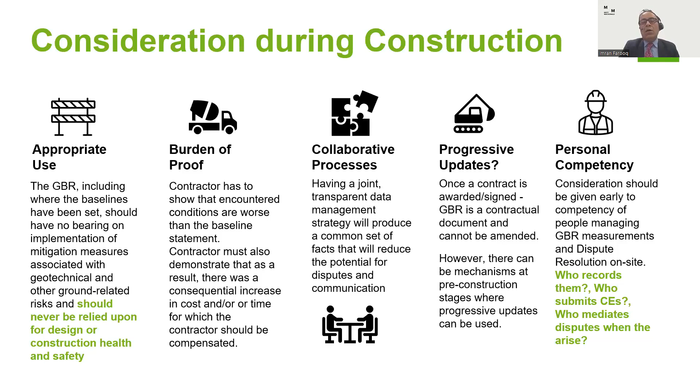Finally, just some selected conclusions from the presentation and also from the report. GBRs are a good thing to be usefully applied to much smaller and simpler projects than at present. GBRs can greatly simplify dealing with unforeseen ground conditions during construction, and we've provided in the documents guidance on using it through an NEC. Baseline must be realistic, it should be measurable and measured safely. And finally, drafting errors can be very expensive. Thank you very much.

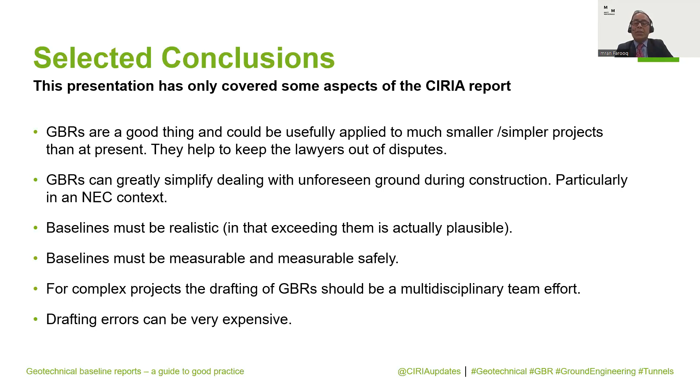There's a lot of comments and questions that have come in that helpfully our panel have attempted to answer as they've gone. I'm not clear whether those are then invisible to the rest of the audience, so we may well end up dipping back into some of the questions that were typed earlier that may have disappeared. Tom, do you want to kick off?

Yes, thank you very much, Andy, and thank you very much to the panel for their wonderful presentation. I'm going to try and go through these questions in the order that they came in. I might diverge from that, but yeah, I think so. Thank you for everyone who has put their questions in. We've had a good load of questions already, so that's great. Do keep them coming in.

Gary Walker submitted a question about expanding on the statement from the NEC if a baseline deviates from fact. I think that's been answered, John, so I think we'll move straight on, and maybe I can throw this next question to Anthony. Anthony, if you want to also ask someone else to contribute, please do. But it's from Frank: how do we get clients to see the value in spending more upfront, i.e., one way or another, they'll pay for a ground investigation.

Yes, thank you. I know Randy has provided a response here and referenced some of the earlier reports that deal with this issue directly, and Randy's probably got some other things he was going to say. But I guess this is something in the geotechnical industry that has always, certainly as long as I've been involved, been an issue. Clearly, we have some very well-educated clients now who are spending a lot of money on ground investigation. And to some extent, I think on those big projects where a lot of money is being spent, the problem has become more about the timing of that ground investigation than the quantum necessarily.